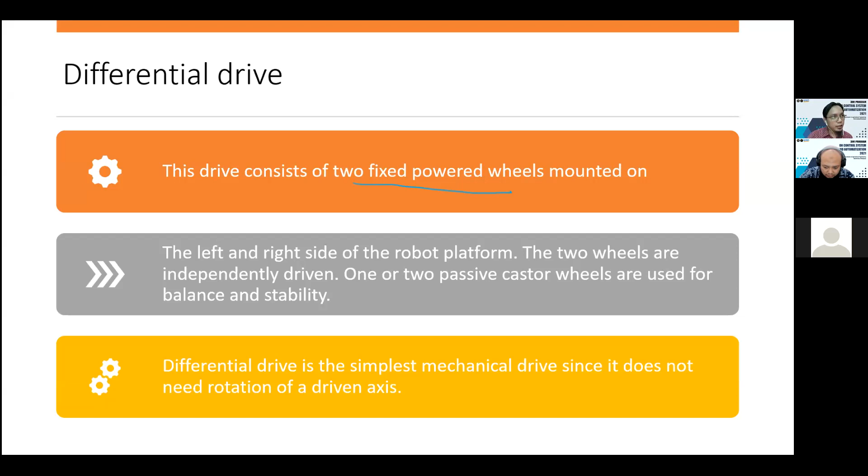Meaning you will have two motors and at least one caster, so that your robot can be balanced. This is the simplest mechanical drive, since it doesn't need rotation of a driven axis. So we don't need a steering drive; we only need two tires. So this is the concept of the differential drive.

And if we reverse the polarity like this, you can create a circle, but the circle is not at the center of gravity of the robot. It's at the center of the axle between these two tires. That's why you can see this is the circle rotation of the robot. Some people get confused and assume the circle is at this part, but in actual cases, for the differential drive, the circle is driven by these two things.

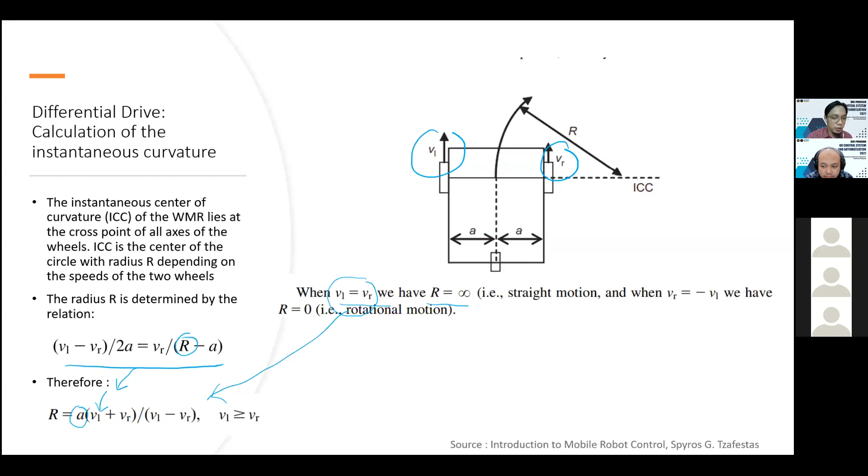And next we have tricycle motion. This drive has a single wheel which is both driven or powered and steered. Compared to the differential drive, it only has a single wheel, whereby the single wheel is driving and steering. Then for stability, 2 unpowered running wheels at the back or front are used in order to have the 3-point contact required, because when you put your mobile robot on the base, you need at least 3-point contact on the ground so that the robot is stable. So normally we will have 2 caster wheels for tricycle motion.

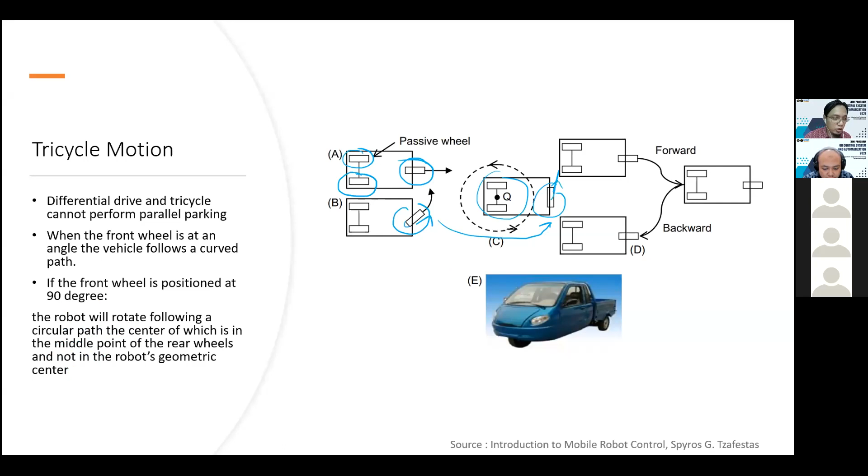Okay, so this is the configuration of the tricycle motion of the robot. So this is one of our projects actually. So we try to make this forklift autonomous. So if you see here, the forklift, actually the electrical forklift I'm talking about, there are different kinds of forklift, but the forklift that we are using, maybe let me pause first.

The forklift that we are using is using what we call a tricycle motion. So it's actually an electric forklift. So if you see from here, there is a shaft over here connecting to this tire. So this tire can be used to control the drive. But you can see here, normally when we have an electric forklift, the operator will control this steering, right? The steering, so that you can create a movement of your robot.

But if you want to make this robot become autonomous, right now we already have one single speed drive tire here. So what we do is we install one motor that is controlling the steering, and we replace the ECU inside here with our own controller. So this is the example of the tricycle motion. So if you see from here,

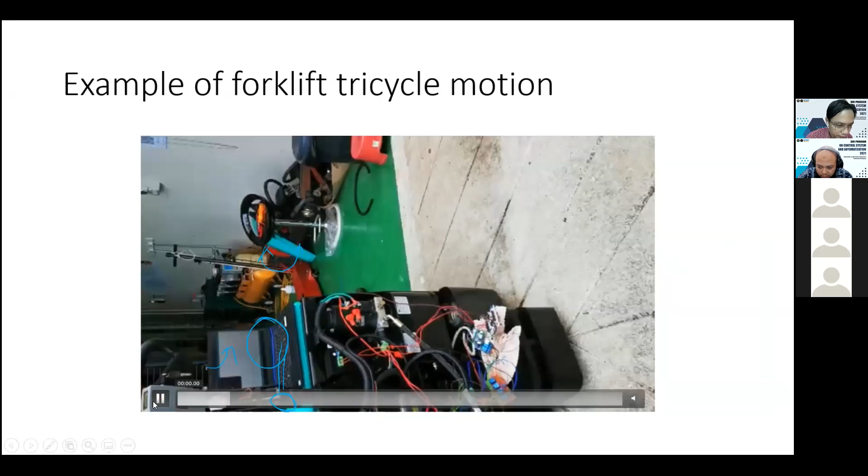when we install these two motors, you can see that first, there is a caster wheel at the back. So this wheel does not have any motor. They just run freely, but we can control the drive and the steer at the same time using the wheel inside here. So you have 1, 2, or maybe some will have 4 caster wheels, but one single wheel at this part. So this is the example of the tricycle forklift motion.

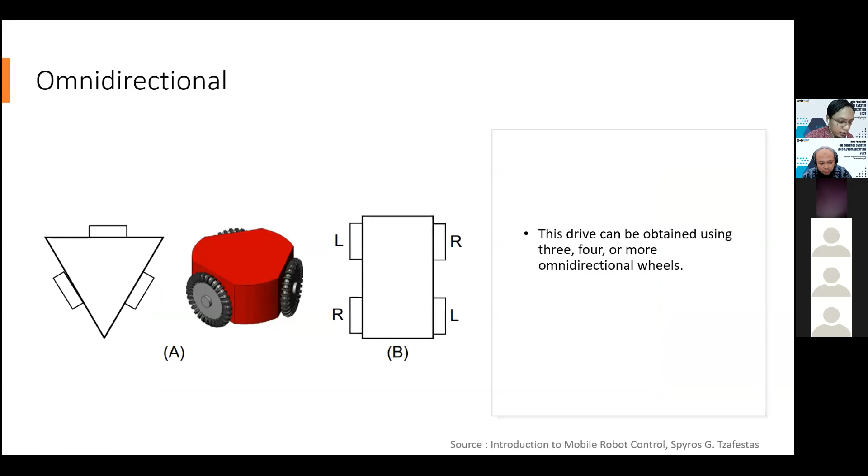And next we will have omnidirectional. So this drive can be obtained using 3, 4, or more omnidirectional wheels. So using this omnidirectional, for example, this 4 mecanum wheel configuration, this type of motion is the most flexible motion, whereby you can have a parallel motion. So if you see from here, we will have a parallel motion by controlling the magnitude and the vector direction of each wheel.

So if on the left side you have the reverse polarity, and on the right side you are going outward from the vector direction, you can have left parallel motion, you can have the turning that you want by having this configuration, and you can have a right parallel motion. So this is the most flexible configuration, but of course, this is the most complicated kind of motion for our robot. But normally, it depends on the application that we use.

For example, if we really need to design a robot, normally this kind of parallel omnidirectional, we use it on a flat surface, and in a plant where the space is limited and you need to have a parallel side motion. So this is the type of configuration. But if you have plenty of space and you still choose this type of configuration, it means that you are introducing more complex joint motion into your system.

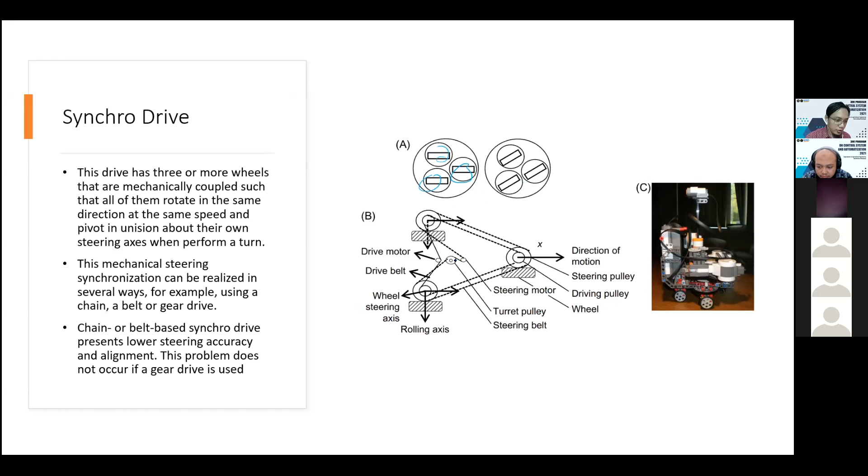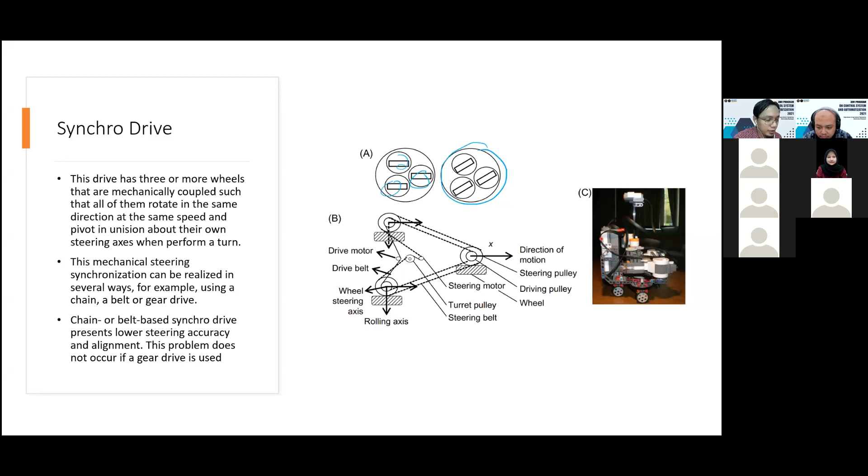And the next part is the synchro drive motion. So the difference from the previous motion is we will have a drive at the tire here, but for the steering, you will have something like a mechanical linkage steering. So if we rotate the steering, these three will be steered at the same time. So this kind of configuration will ensure that you don't have any difference in terms of the steering value, by having some belting at your motor, at your tire. This configuration we call synchro drive.

The reason is, if you want an application that requires a very precise angle for each of the robot's tires, you can use this configuration. But the problem is when we introduce a mechanical linkage such as a belt, you have to consider the resolution of the belt. If you are using a chain, the chain also has a minimum resolution. So if you want an angle of rotation less than a certain degree, you cannot have that because of the mechanical constraint. Also, if we are using belting, we need to use, for example, a steering tensioner.

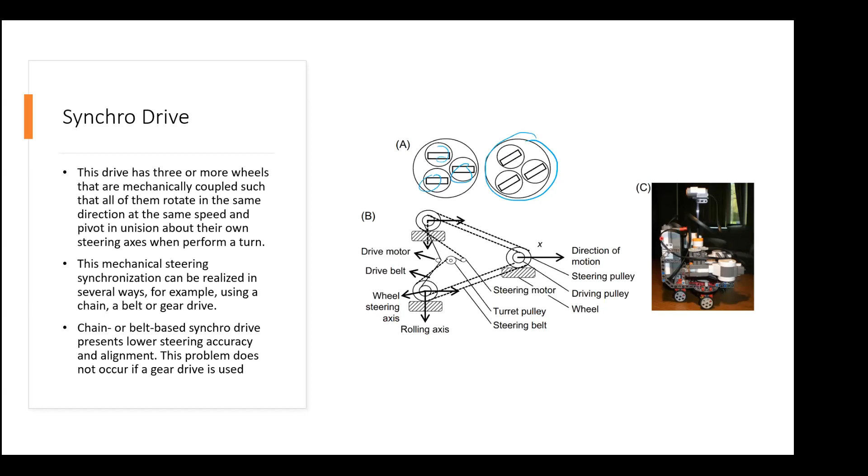This kind of mechanical complexity will be introduced, and it becomes more complex because you are trying to create an advanced system, and at the same time you have to deal with a mechanical problem. So this is the limitation of the synchro drive. The next is also the most famous one, what we call Ackerman steering.

So this also kind of configuration is being used in mobile robot navigation. Normally we are using two kinds of configuration: either a differential drive or Ackerman steering. The tricycle and the forklift motion are not common. Normally they don't opt for the tricycle motion. The Ackerman steering is the standard steering that is used in our car, in automobiles.

And some outdoor robots, for example some agriculture robots, also use this kind of Ackerman steering. It consists of two combined driven rear wheels, meaning we have driven rear wheels connected by one axle, and two combined steered front wheels. Ackerman steering is designed to ensure that the turn of the wheels at all axles have a common cross point, the instantaneous center of rotation, which we need to understand in order to predict the cornering. Ackerman steering also tries to avoid slippage.

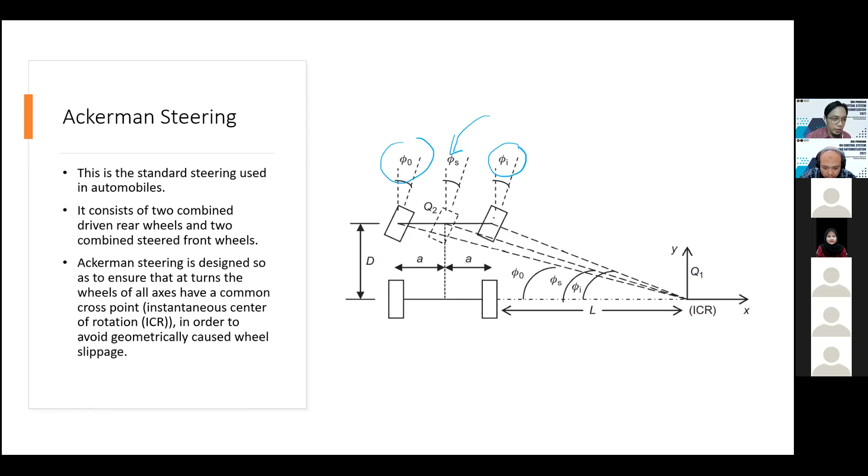Next, we have the skid steering configuration. This is a specialized implementation of differential drive, realized in tracks in the form of bulldozers and armored vehicles. It's different from differential drive and increases maneuverability in uneven terrain. So in agriculture, for example, where you have very uneven terrain, you can opt for this kind of configuration. It has higher friction due to its tracks and multiple contact points with the terrain, rough or even. So it's like an armor.

That's why we see it used for military purposes, for bulldozers, or for tractors and future mobile robots for agriculture; they use similar contact points like the skid steering configuration to increase contact with the uneven terrain. So for agriculture, this may be suitable. And right now we have been through a lot of the configurations of the mobile robot.

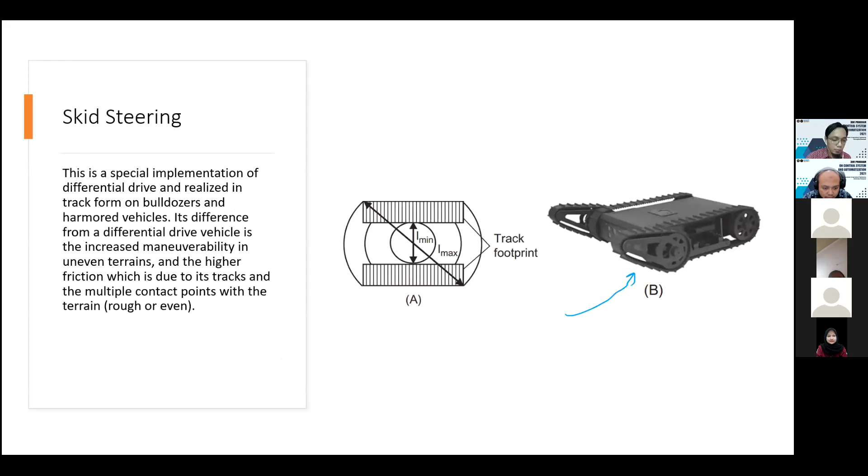Now we want to understand why we need this kind of mathematical configuration. This is what we call mobile robot kinematics. So what is mobile robot kinematics? It is the configuration of the robot in our space. We try to understand the relation of the robot with its geometric parameters, the robot size, and the constraints: what maneuvers this robot can and cannot do, depending on the trajectory. That is why in your simulation your robot moves in a certain kind of motion. It cannot suddenly parallel park. Even if you modify the coding, you cannot have parallel parking. You need to modify the mathematical model itself.

So the kinematic equation depends on the geometrical structure of the robot. For example, your robot can have Cartesian, cylindrical, spherical, and articulated structures. This is more for robot arm configurations. So this is just the introduction to robot kinematics. Normally, if we want to understand how our robot moves in certain parameters, we need to understand these three kinds of information.

Actually, it's quite a topic, but I try to give an overview because it involves a lot of mathematical equations. So there will be direct and inverse robot kinematics, homogeneous transformations, and some constraints on the system. So for example, what is direct and inverse kinematics?

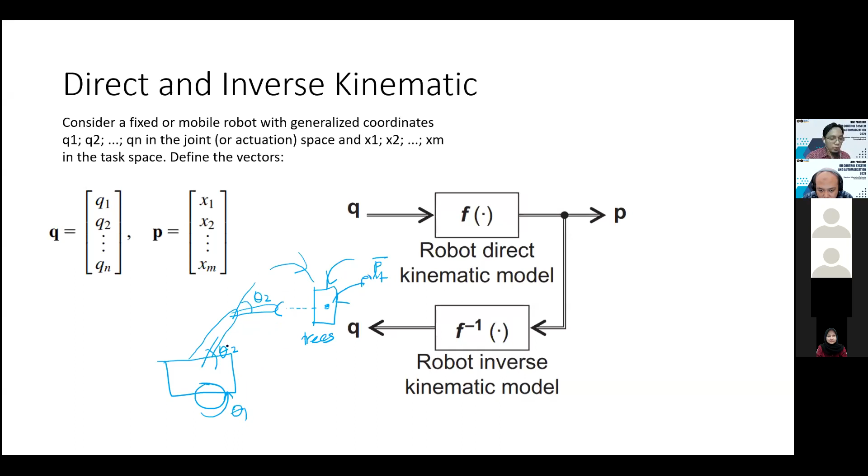So the question is, what happens if I change the value of theta 1, theta 2, and theta 3 so that I can arrive here? So this is what we call a problem that we have to solve. We have two problems here, the direct kinematic problem and the inverse kinematic problem. So the direct kinematic problem is, let's say, I call it direct kinematics.

If I change my theta, meaning if I change my theta 1, theta 2, and theta 3, what will be the position of the robot, right? So this is the direct kinematic problem that I have to solve. With that, I need to understand what is the mathematical equation that I have to derive inside my robot. So this is what we call the direct kinematics problem. And next is inverse kinematics.

Okay, so the inverse kinematic problem, if we compare with direct: for example, if I give a certain value of theta 1, theta 2, and theta 3, maybe my robot will arrive at this location, at a second location, which is from A to B. So when we want to predict this thing, we need to have a math equation of the direct kinematic problem.

But for the inverse kinematic problem, for example, I want to go to this tree. I want to go to this tree whereby this tree has this point. For example, this tree is a tomato tree. So if my robot wants to harvest this tomato tree, it means that I need to know the location of this tomato tree, right?

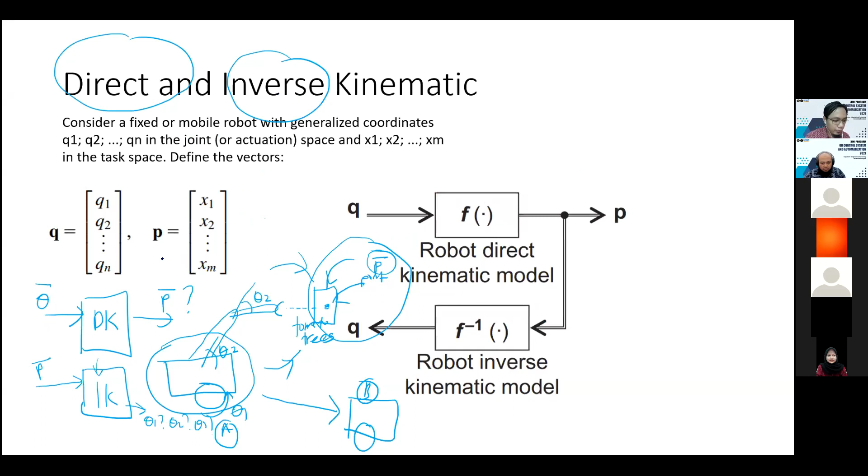So that's why you can see from the diagram that I drew for you, normally we translate this diagram into a mathematical matrix, because this mathematics will be put into our computer for calculation. So we will have some matrices, some equations inside here. And kinematics is the branch of mechanics that investigates the motion of material bodies without referring to their mass or moment of inertia, or the forces that produce the motion.

Clearly, the kinematic equation does depend on the fixed geometry of the robot in the fixed world coordinate frame. So when we consider robot kinematics, normally we consider that the robot is moving at X and Y coordinates, and sometimes in 3D coordinate space, so we will have X, Y, and Z. We assume that our robot is moving into this space.

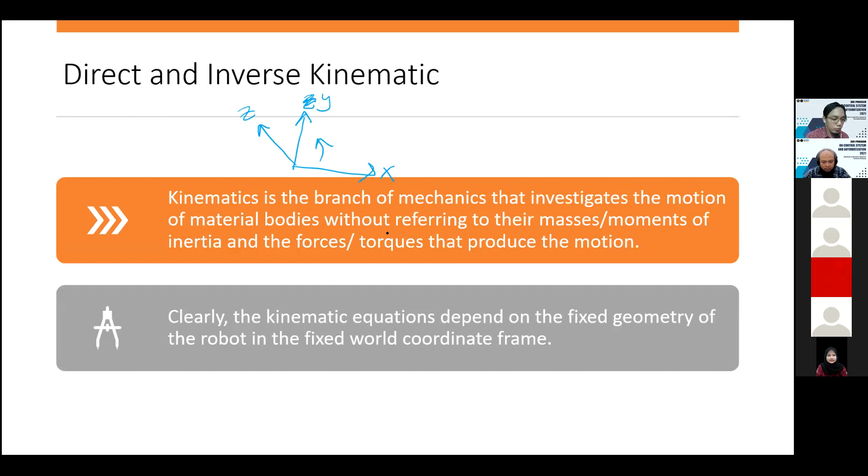And if you see this definition, we don't have any information on the mass, moment of inertia, and the force and torque that is required in applying this kind of motion that we want.

But for a very heavy application, let me give you an analogy. When we are driving a car, if we drive at a very slow motion, maybe 5 km/h, very slow, and you want to brake your car, you can immediately brake without anything happening. You can immediately stop at the point that you want. So this is what happens when you drive your car very slowly.

But when you drive a heavy car, like a lorry, at a very fast speed, for example 80 km per hour, and you try to stop immediately by pressing the brake maximum, you can see that we cannot immediately stop the lorry. There will be some effect. This effect is called the inertial effect, and the moment of inertial effect is due to the mass that is introduced to the body of your system.

Because of that, we cannot rely on kinematics alone if we have this kind of very fast and heavy robot, whereby we need to consider the dynamics as well.

And also, in robotics we have a new term, what we call the Jacobian matrix. Normally you can see some mathematics here, so I try to put it in a very simple way to explain.

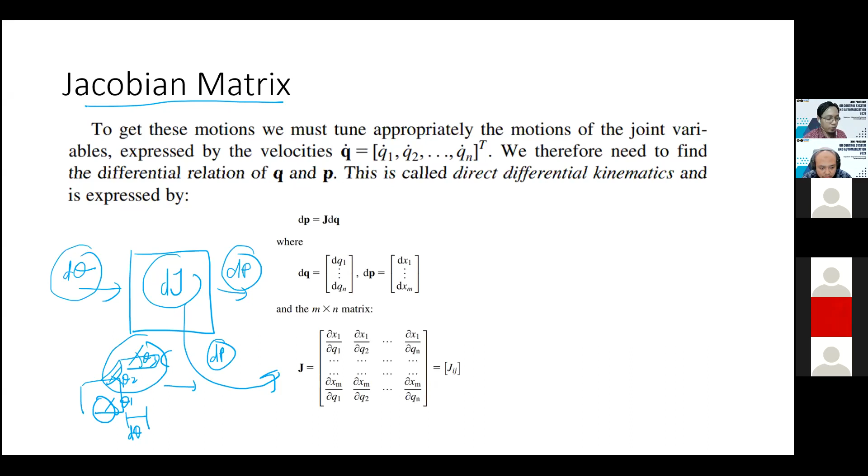So by having this kind of prediction, I can predict what will be the generated velocity of my robot, the generated position displacement of my robot. This kind of displacement relationship is normally expressed by what we call a Jacobian matrix. This is a term we use a lot in the mathematics. The Jacobian matrix will also have a direct Jacobian and an inverse Jacobian, similar to direct and inverse kinematics.

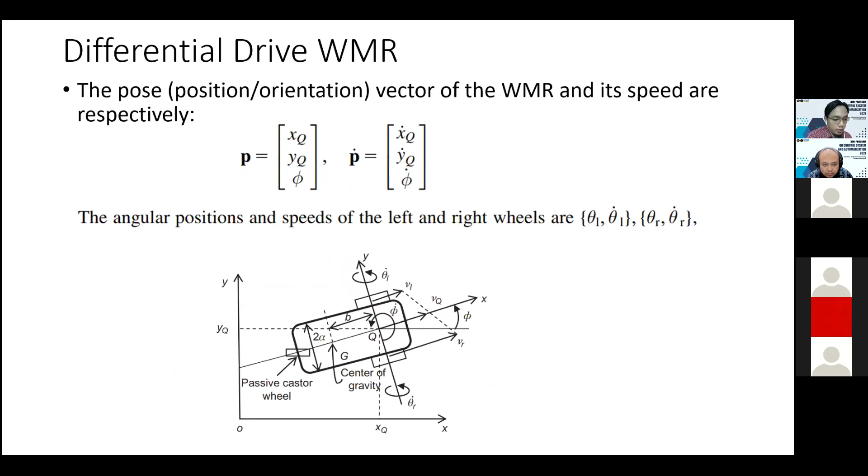I don't want to go into that, but this is how we go into the mathematical representation of the Jacobian of the robot. Next, just now we saw the differential drive robot configuration. I showed you that by understanding the left and right positioning vectors, we can do the differential motion and predict the radius. In fact, if the position of the robot is defined by P, we can predict the position and orientation.

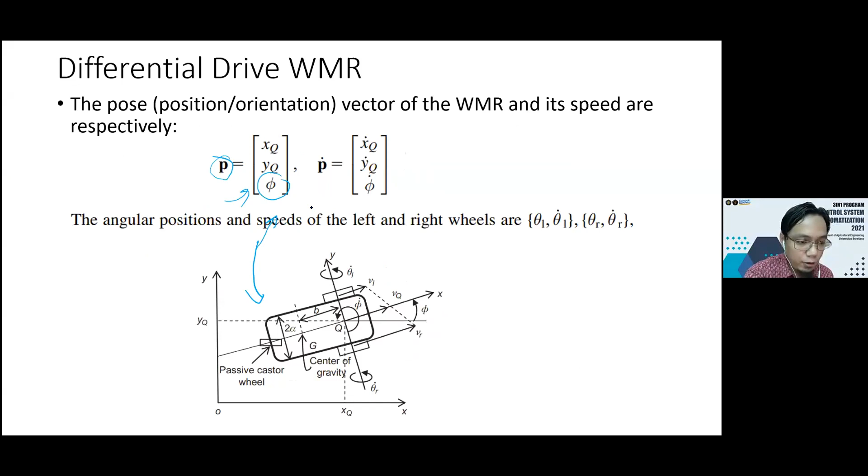This is the orientation of the robot. By having this kind of configuration, we can put whatever our robot location is, something like this, into a matrix form here. And if we integrate, we can do this kind of thing. We can have a velocity relationship of our robot. So when we put the matrix like this, you can see that this is what happens in a real case, in the robot.

And when we have this, you can calculate the velocity of your robot in the X direction. We have X and Y directions here. If we have a movement on the X direction, that means you will have a velocity movement in this direction. And if you have a movement in the Y direction, that means you have a velocity movement in the Y dot direction. Eventually you will have your VQ, your total generated velocity movement at this direction. So with that, we can break down our velocity relationship into two axes here.

So you can see that we will have the velocity movement in the x direction, and we will have the velocity movement in the y direction, whereby you will have a total combined velocity with respect to your robot heading. So this is your robot heading.

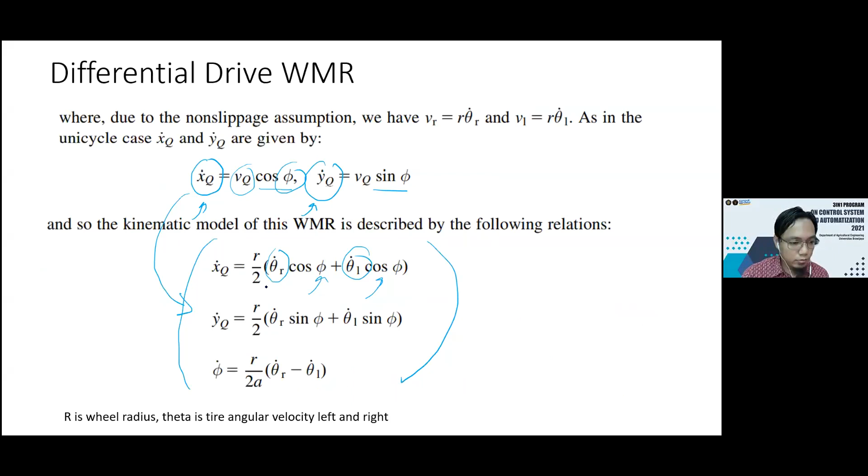The velocity and orientation velocity of your robot. And also the kinematic of the mobile robot can also be written in terms of the Jacobian matrix form. So you can see from here, we can represent the similar equation here. We can put it in something like this. We can rearrange into a matrix, and you can simplify it something like this. Why do we want to simplify it later?

Because normally when we want to do some control system analysis, some calculation of the motion, we will have this matrix easy to calculate using some tools inside the simulation. So that's why we need to arrange it into this form.

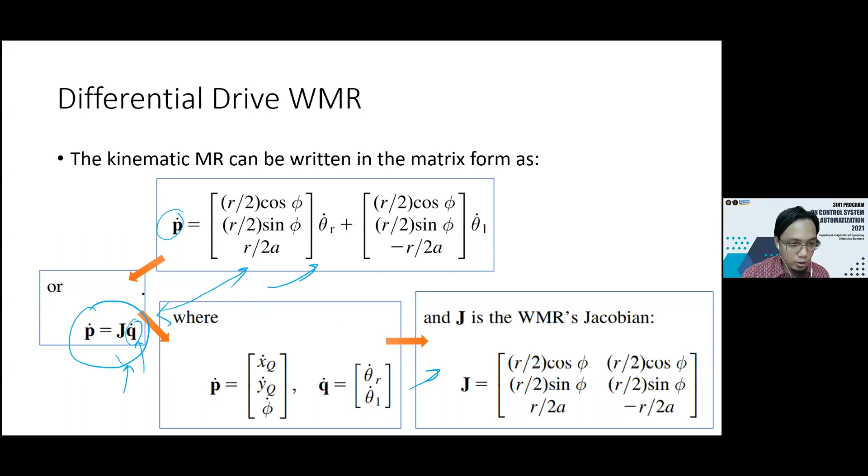And if you see this relationship, you can see here the general equation, and we simplified this equation on the bottom here. If we have a change in theta, in our robot's motor motion, theta dot, we call it theta dot, whereby we represent it by q dot.

And if we have a J here, this is the J, whereby the J is from the above here, you can predict what is happening to the position dot. So what is happening to the velocity, position velocity, means that you can predict this p dot here. So this is your p dot. So it means that we can predict what is the velocity motion of the system.

So if we can predict the velocity, if we want to see what is the location, you can simply do the integration, right? For example, I want to see what is my location in the x direction. I already know I have the x dot. So if I integrate my x dot with dt, I can predict what is my x direction, what is my y direction, by having this Jacobian matrix representation.

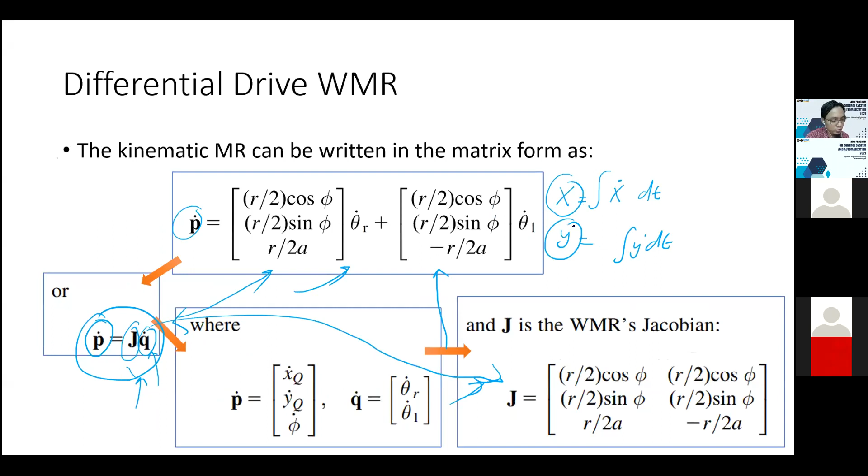So this is how we do it. And this is some example of the differential drive motion. So this is if we try to load it into the simulation environment.

So if you can see here, okay, this is one kind of robot whereby this robot has two wheels here, whereby each wheel is independent of each other. And this robot also has the inertial measurement unit sensor and odometer sensor, so that we can see and control it. So for example, on the terminal here, we try to give some command here, some cornering command.

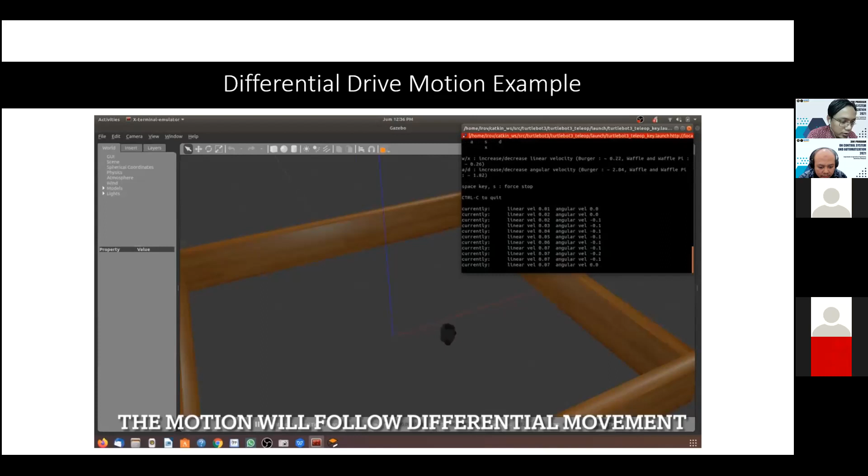So you can see that this robot does not have a parallel motion. It has some trajectory motion, like the example you did in Python. So the example like you did in Python will have the same kind of curvature motion on the differential drive motion.

So when we understand these properties, we can use, for example, if this robot is moving, and if we understand the mathematical equation, we can take this robot's dimension, and you can calculate it so that you can predict whether it has the same yaw rate, the same location, similar to the example or not.

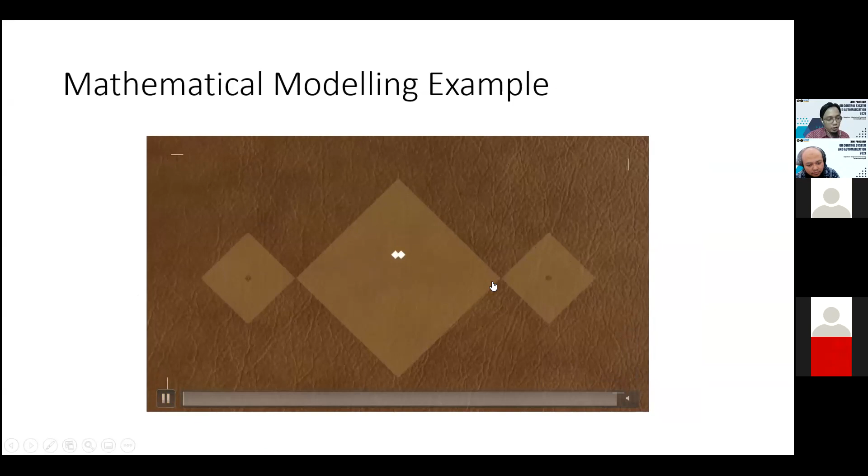And by having this, you also can, if you're familiar with MATLAB, do the calculation on the mathematical equation. So for example, this is the example of the differential drive mathematical equation, the mathematics that I showed you. So if you see from here, we can have the right wheel velocity, the acceleration of the right wheel, and also you will have a left wheel velocity and the acceleration of the left wheel.

So we can predict, for example, on the left wheel, we give a higher speed compared to the right wheel. We can play with it, and this is normally some Jacobian matrix, some mathematical equation that I showed you.

So we can play around to see how our robot behaves. So when we have this equation, we put it into, for example, MATLAB, or if you don't want to use MATLAB, you can also do the same thing in Python. And we run our simulation.

For example, you can see here, the left wheel velocity is higher than the right wheel. You can see that on the simulation just now, the movement of the robot is turning to the right direction.

So let's say we change it, the acceleration of the right wheel is higher compared to here. So it changes its movement from the right to the left, because of the acceleration that we give on the right wheel. So this is the example if we use the differential motion.

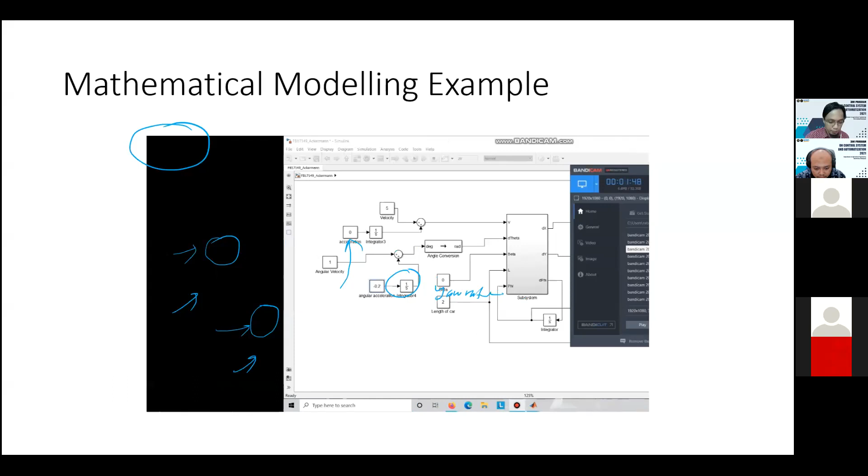So when we understand this mathematical modeling, you can predict this kind of thing, meaning that you can do later, when we do the control system, you can do the control system part. Okay, that is enough on the kinematic modeling of your system.

Also, okay, this is a kinematic model of lateral vehicle motion. What is lateral vehicle motion? When you have, for example, this is your robot, the motion of the robot, this is the global axis, you will have the robot axis. For example, let's say this is X1 and this is Y1. So this means your robot's front direction is like this, in the front direction.

So normally when we create a robot, we want to create an autonomous robot that moves something like this. And if we want to create the robot that is moving like this, we need to understand, for example, this is our road or our trajectory that we want to go. We want to understand what is the error in order to follow this road, whereby our objective is to minimize this error so that when you create the control system, you can achieve better control. This kind of error, we call the lateral error.

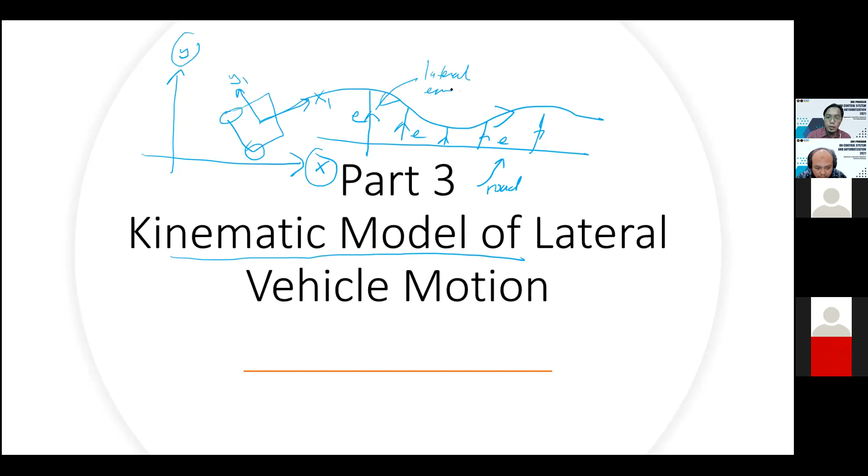And in order to understand the lateral error, we need to understand the lateral vehicle motion. So that's why we need to develop some of the kinematics of the lateral vehicle motion, as you can see on the screen here. So this kinematic, sometimes we call it a bicycle model, where we neglect some slippage of the vehicle itself, and we will have a bicycle model using the diagram here.

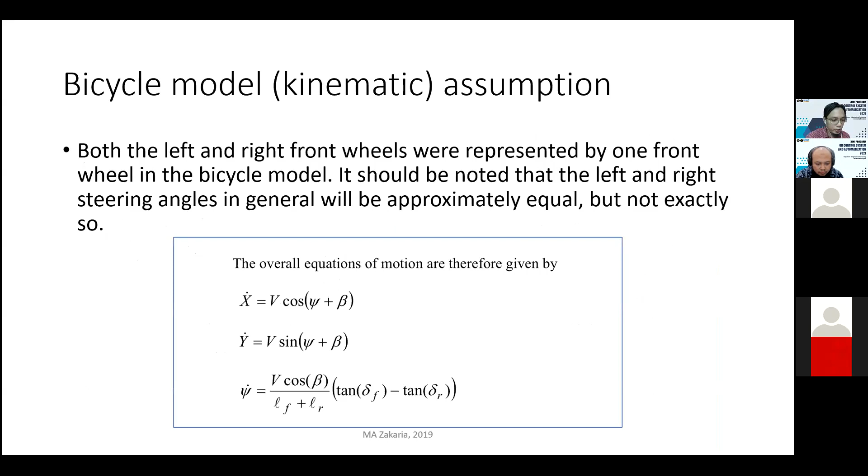We can use the same bicycle model, whereby the bicycle model will have some relationship between the body slip - what is happening if your vehicle or robot has some body slip - and what is happening if you have a steering configuration of your robot. And also we can consider the Ackermann turning geometry in order to understand the robot and its geometry.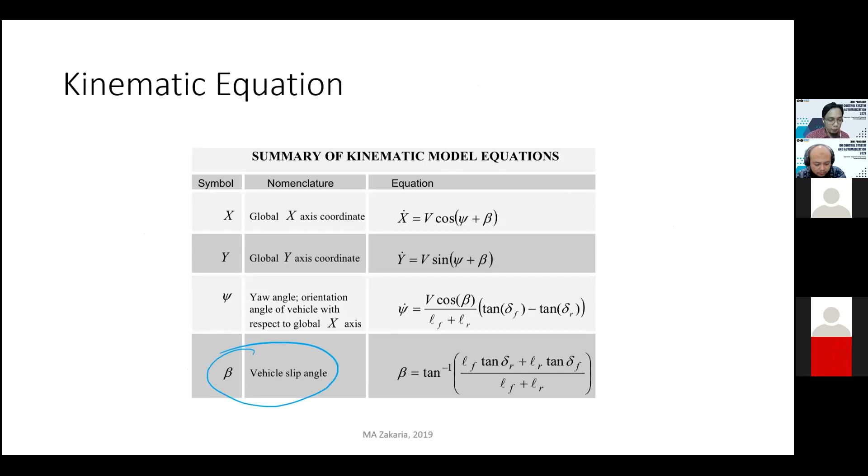And also, this is the summary of the kinematic model equations, whereby, for example, if we use vehicle slip angle, you can see that we have a lot of equations. From the previous kinematic, you have a general kinematic, but for this equation, the bicycle model, you have some equations that consider the robot or vehicle slip angle, so that we can estimate what is happening if we have some slip over here.

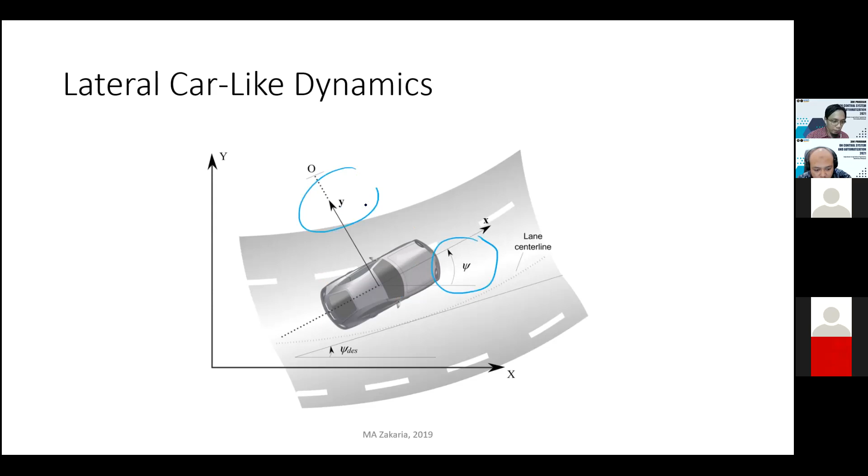And also, if we want to generate motion at higher velocity of the robot, we need to consider the dynamics as well, because the force of the momentum, or moment of inertia, is involved inside our robot's configuration. So at higher speed, the assumption that velocity of each wheel in that direction holds is no longer valid. In this case, instead of the kinematic model, a dynamic model for lateral vehicle motion must be developed, so we want to understand what is happening if we have a dynamic of our robot here. You need to understand, if we take a cornering here, what is happening to our yaw rate, what is happening to our robot.

So normally in the control system part, they have one topic they call the state space model, whereby in the mobile robot, normally we use a bicycle model for Ackermann-like steering, so that you have a state space configuration. This state space configuration tries to generate the behavior of our robot in this form. What is meant by this form is if we have any, they call it plant.

In control system terminology, they call it plant. But in simple words, this is your robot. Inside here, this is your robot. So if, for example, I'm giving my vehicle velocity at 100 km per hour, and I'm giving the steering angle as 20 degrees, right? In order to control my robot, means that my vehicle is traveling at 100 km per hour, whereby the steering of my vehicle is 20 degrees.

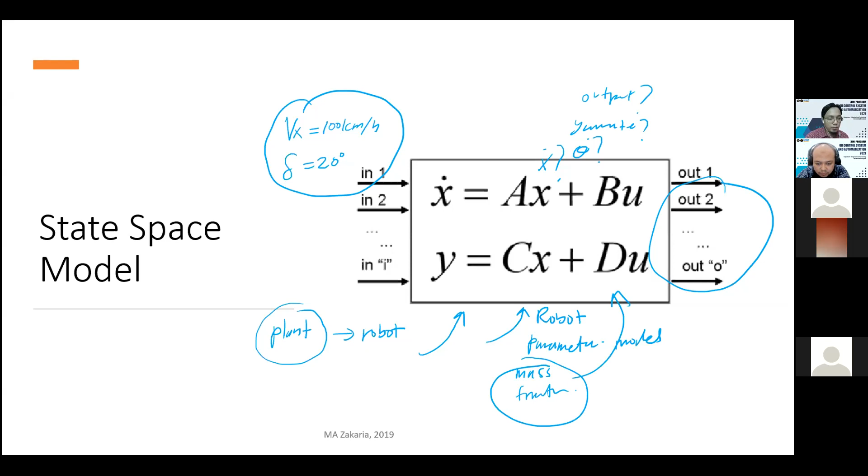What will be the output? What is the yaw rate? How does it move? What will be the position? Right. So this will become the output, whereby we can simulate what is happening. Inside this state space model is our robot parameter model. Means that you will put the mass of your robot, the friction coefficient, a lot of the dynamic parameters inside here. So if we have the dynamic parameters inside this equation, and we put the input, the steering input, and the velocity set that we want, then you will be able to predict the yaw rate motion of your system by having a state space model.

And we can also consider if, for example, your robot is navigating on different terrain, right? For example, you have a road bank angle, means that my robot is something like this. This is my tire. So if we have this kind of angle, we can consider it. For example, in agriculture, your robot is navigating on uneven terrain, whereby you have what we call a road bank angle, and the road bank angle is always changing its value. Normally in the experiment, to measure this inclination, we use an accelerometer so that you can estimate the inclination angle of your robot. Using state space, you can also estimate what is happening to your robot if you consider this road bank angle.

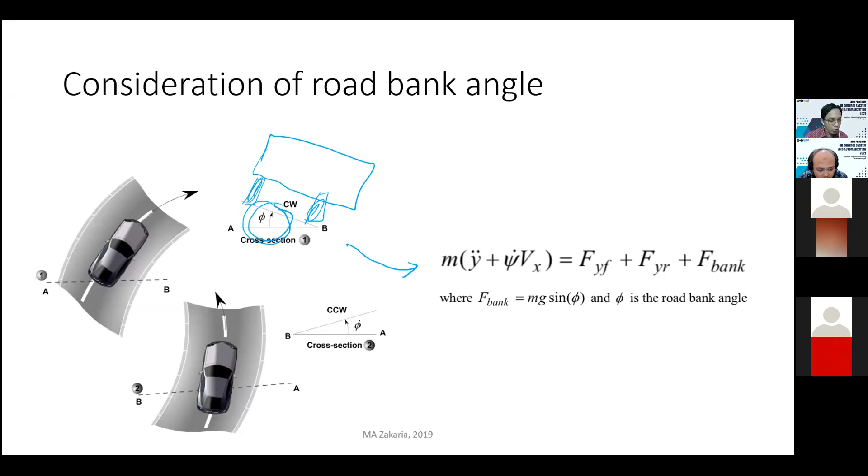And when we develop this state space, we can expand the model by understanding what is lateral error and what is orientation error. So the lateral error, as I said, for example, I have my target point, my road here. I want to go to the target here. So this is E1, my lateral error. What is my orientation error? Let's say this is my robot heading, heading angle 1. And this is my road heading in this direction, heading angle 2. So you can see that we have two different heading angles, H1 and H2, whereby this difference is called the orientation error.

So if you minimize E1, if E1 becomes 0, we can say that the robot will be located on our target trajectory. If E2 becomes 0, we can say that the robot follows the orientation of the system. Okay, so this is actually the simulation that you did in Python in Anaconda previously. You have three simulations: move to pose, model predictive control, and another simulation, I don't remember the name. One more is the Stanley controller.

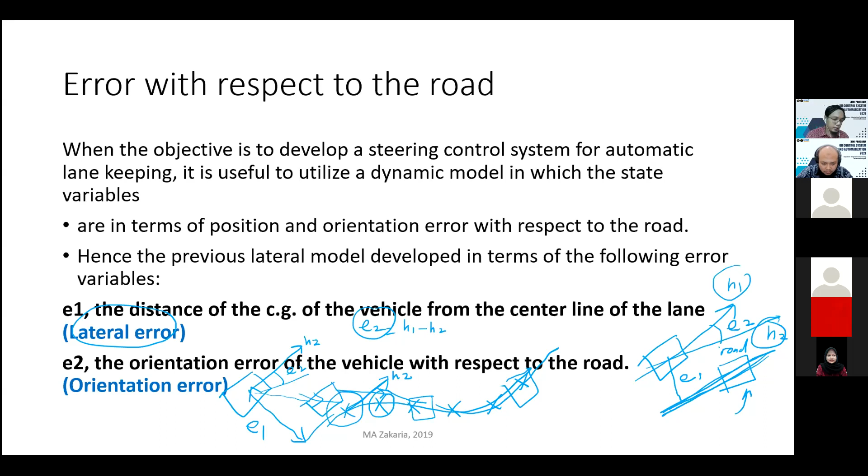So there are 2 kinds of error that we need to understand: the distance error, lateral error, and the orientation error. So these 2 errors are the most important errors when we want to develop an autonomous robot. Of course, there will be other errors. For uneven terrain, maybe you have a roll rate error, this kind of thing. But the basic is these 2 errors that we have to understand first.

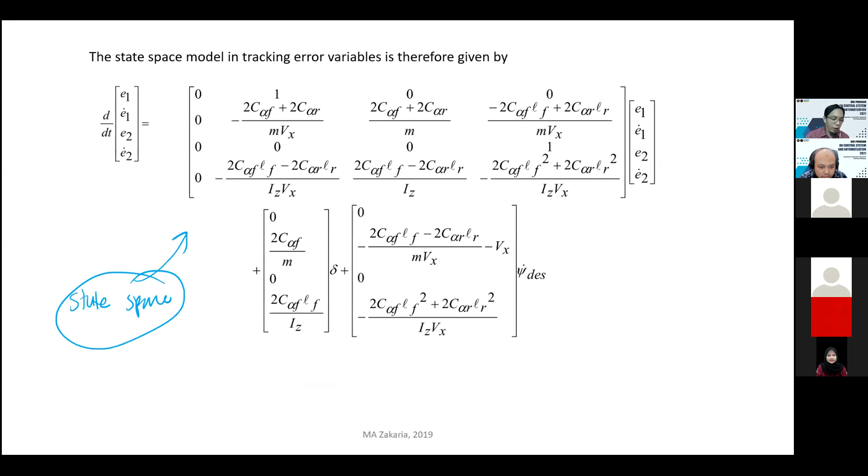And using this error, we can derive the equation here. Just see the slide. Yeah, they have some mathematical part here. And eventually we can relate the error that we want in the state space form. So we can generate a state space form here, so that when you have this state space form, we can simulate the movement of our robot, the dynamic movement of our robot.

And if we include the road bank angle here, which is the sine phi here, you can see that the equation becomes something like this. And if you put this equation inside Simulink, you can generate the movement of the robot. And in fact, you can do the state space simulation if you don't have MATLAB installed in your laptop. You can do the simulation of the state space in Python as well.

You can Google the state space Python toolbox. Then there will be a Python toolbox, and inside the Python toolbox they have A, B, C, D, so that you can put the matrix of the equation inside Python, and then you will be able to generate the motion equation of your system. And this is the summary of the motion equation of the robot.

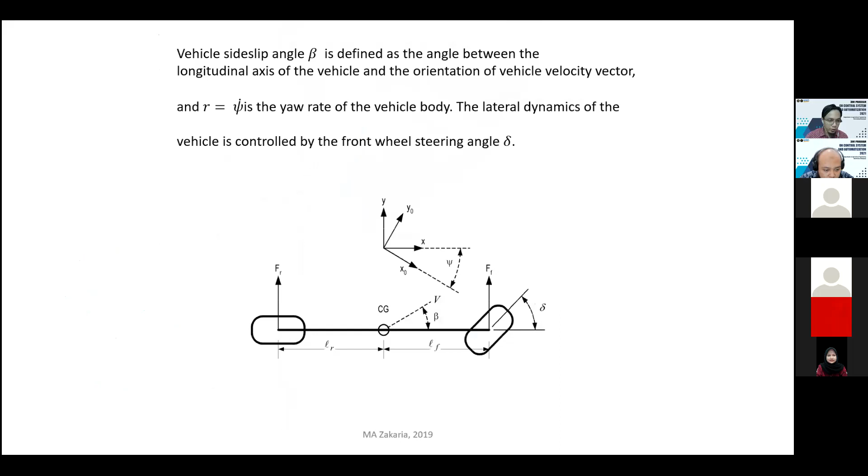And do we have a detail about the dynamic motion in terms of the lateral? You can estimate the force motion using this equation, the body slip. I don't want to go in detail in this equation, but I just show you an overview so that you see what is happening if you go in detail on mobile robot navigation. So you will see a lot of these equations. Although it seems complex, it is necessary for us to really estimate the motion of our robot.

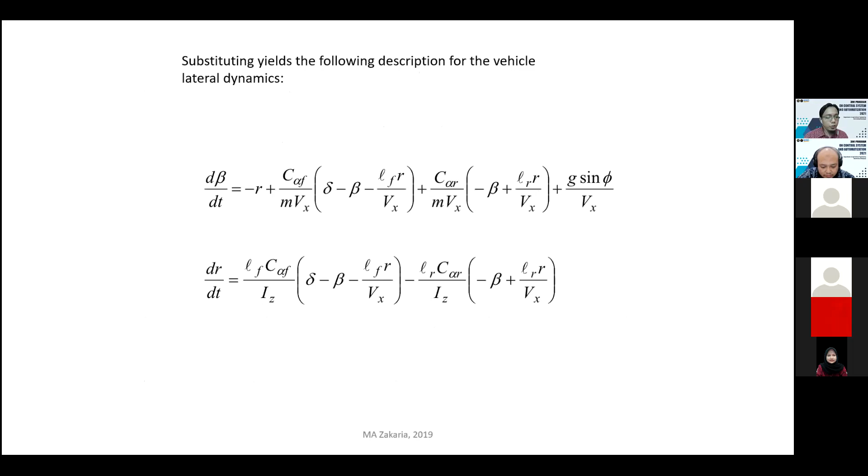So in summary, I have shown to you the kinematic and dynamics model of the robot. And in order to understand this model, more in-depth study, of course, every topic you will have a lot of analysis you have to do. So I hope that with the kinematic overview in the topic that I shared, you are able to have some brief overview. You are able to understand what you are doing with the simulation in the last lecture.

And a good understanding of how the model works will give us an idea of how our robot will perform during the experimental development. So when we want to design our robot, normally we will put it into our simulation platform first, and it will assist our control system development. So normally we don't directly put our control system in our robot. We will try to simulate it, try to tune it, and after everything is ready, we will put it into our control system development. Okay, I'm going to change to a new topic.

Is there any question? I hope that you don't get confused with the equations. Is there any question from students or also some of the lecturers here?

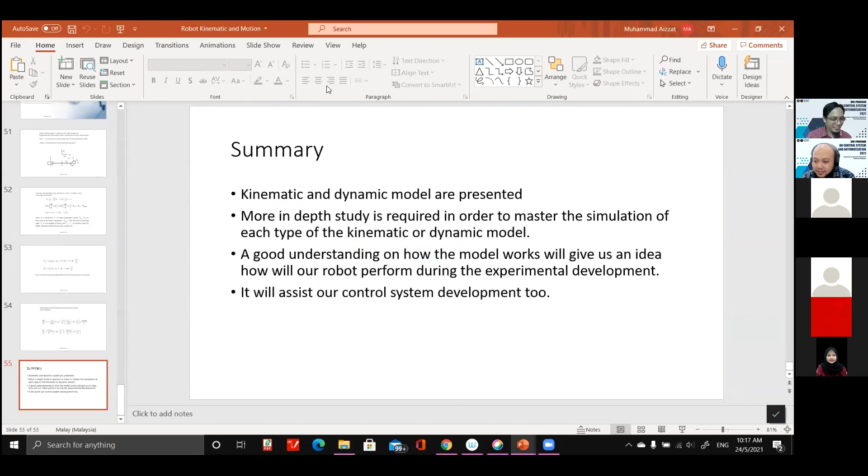I think I just want to have some comments actually. Okay. Actually, in modeling, students will have their lecture in modeling next semester. The students will understand that, will learn the state space model. Oh, good. Actually, in the modeling in biological systems also. Okay, good, very good. So that means they can continue.

Pak Dimas, I also teach the modeling actually. Yeah, so that means they can use the same equation in the state space model, then they can proceed further. I think that's better for them. Yeah, they can also try it in the practical assignment. I agree. Oh, that is good.

Because state space is one chapter in control systems as well, right? They need several topics in state space itself. So maybe I just give an overview only. I don't go into detail in this lecture because of the time. If they want it in detail, I think they will take the modeling. And I usually use MATLAB, but I think Pak Dimas uses Python. Yes. I teach them Python.

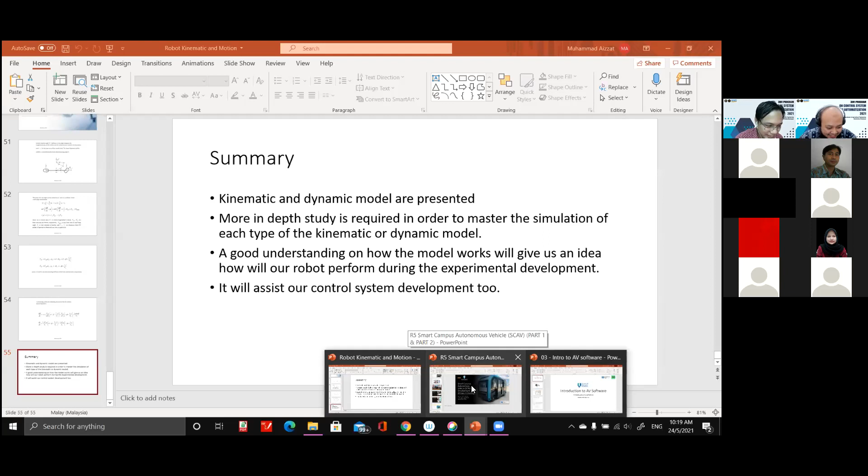So actually, I want to continue from the previous sharing on the case study that we developed in our system. From the previous one, we developed our lane tracking, which is based on the previous topic, sensors, from the image processing sensor. Next I show you why the concept is very important, because by understanding the fundamental aspects, you can create ideas and small things within the student's budget. And when you grab the concept and have more budget, you can expand your ideas.

For example, when I did this with my lab mates, we wanted to create something big because we had already created many small things before. So we started with brainstorming the idea. This is the brainstorming inside the lecture room in 2019. We imagined what we wanted to create, what sensors we wanted to use, where to use them, where to place the battery. So we put down a very general sketch. I show this diagram because it is what kickstarted our project.

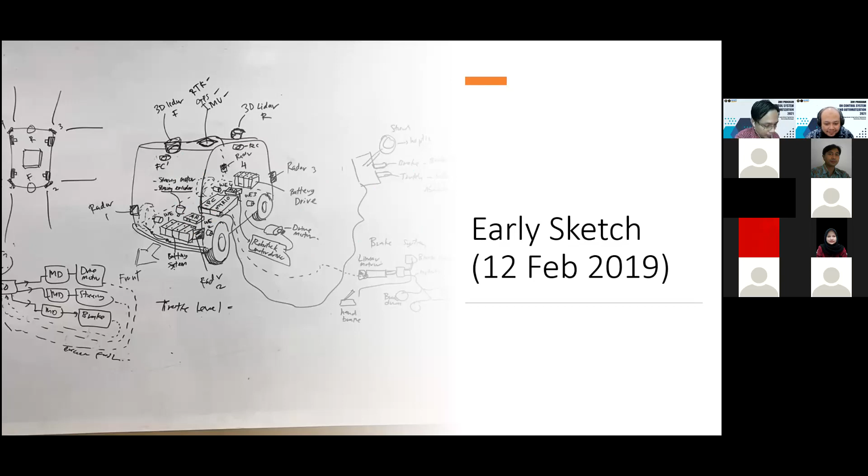I can say that the big thing started from a very small sketch only, and we put some automation for the autonomous vehicle. And it's not just for vehicles, it's for any robot. You need to have a level of automation, from level 0 until level 5. If you want to build an autonomous tractor for agriculture, your robot needs at least level 3 or level 4. So this is part of the autonomous architecture.

Level 5 is fully autonomous, meaning your robot can adapt to any environment and quickly relearn in a very dynamic environment. But a good case is if we can go for an autonomous system at level 3 or level 4. This is what we do in our autonomous bus, and the project is still in progress. We try to develop it in different specific tasks.

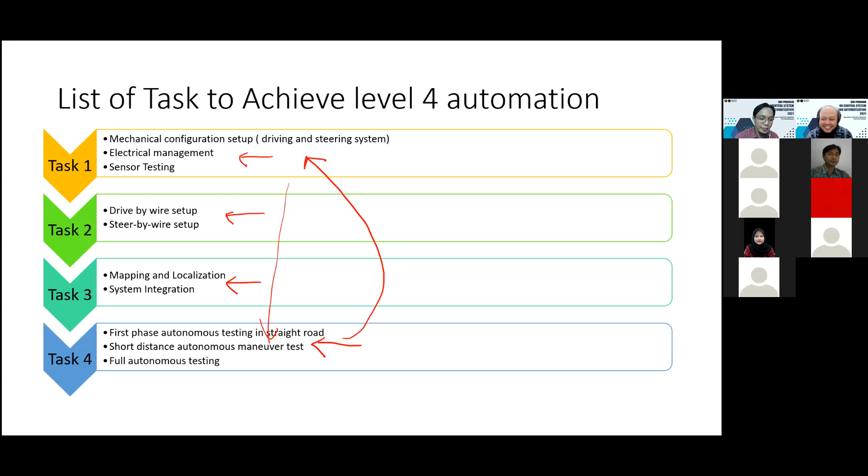Sometimes you feel that you want to give up, but this is normal, especially for students. Even if you start a very simple project that your lecturer gives you, you will feel that, yeah, you short circuit and your controller burns. I think it's normal. In fact, we still have the same thing.

Okay, so this is task number 1. We do the mechanical configuration setup, the driving and steering system, then the electrical management and the sensor testing. We start with the selection of the driving system, in this case the gearbox. We selected a 20 kilowatt electric motor.

In the first prototype, we had a problem with our gearbox, where there was a misalignment between the coupling and differential gear, causing friction and wear. Although the bus can be moved, because of imperfect alignment, maybe during the CAD design development we didn't really fit it well, you can see friction and wear, and you can smell the heat over here on the driving system.

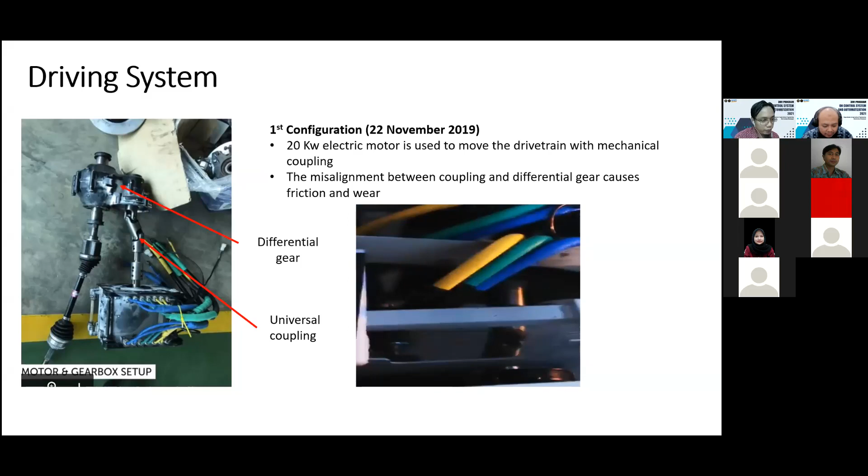Because of that, we modified it. We saw this failure, removed it again, and used a second configuration. Now our bus can move, but this configuration uses a bevel gear, and this bevel gear contributes a lot of noise. The electric bus can be moved, but when we drive it, there is very high noise inside the bus itself.

We don't want this, because when we say electric, we expect the bus to be very low noise. So this is not a good configuration. These drivetrain issues are very time consuming. We stayed at the lab doing a lot of analysis until 2 a.m. in the early morning, and we called a lot of drivetrain engineers in our team to do some calculation to solve this drivetrain issue.

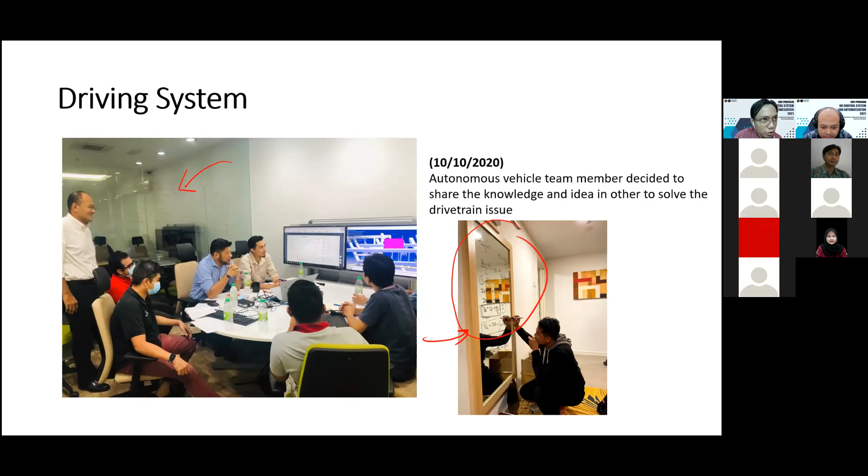This is the part where you need fundamental knowledge. You can see my student doing some mathematical calculation here, dynamic and kinematic calculation on the mirror, because we really need to not repeat any failure we made previously. This is the dynamic calculation, maybe you learn it in dynamics, to calculate the value required for us to move the bus.

Next, we changed the configuration of the drivetrain. With this drivetrain, we eliminated the jerking. This drivetrain is configured based on our previous calculation, and the configuration is better.

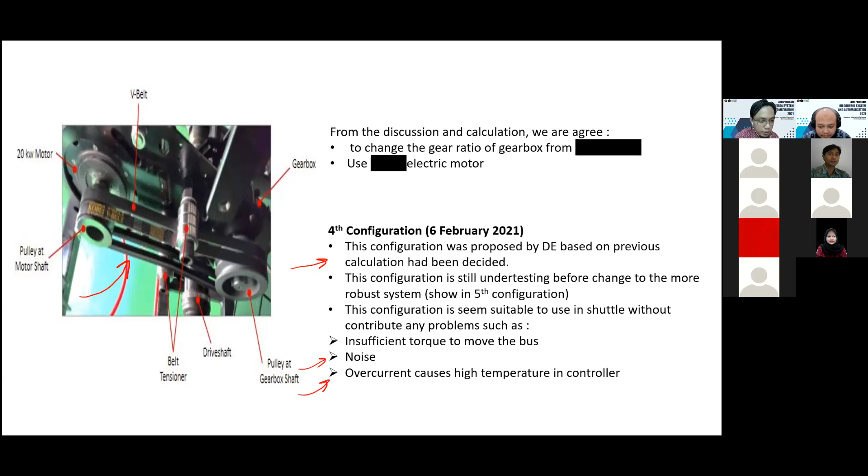It does not contribute to the noise because we use belting and tensioner, but we have insufficient torque. This thing moves, but sometimes during the first phase, it takes a lot of time to move the bus, and although the noise is lesser, they still have noise and some overcurrent issues that cause a high controller spike in our bus. These are the drivetrain issues.

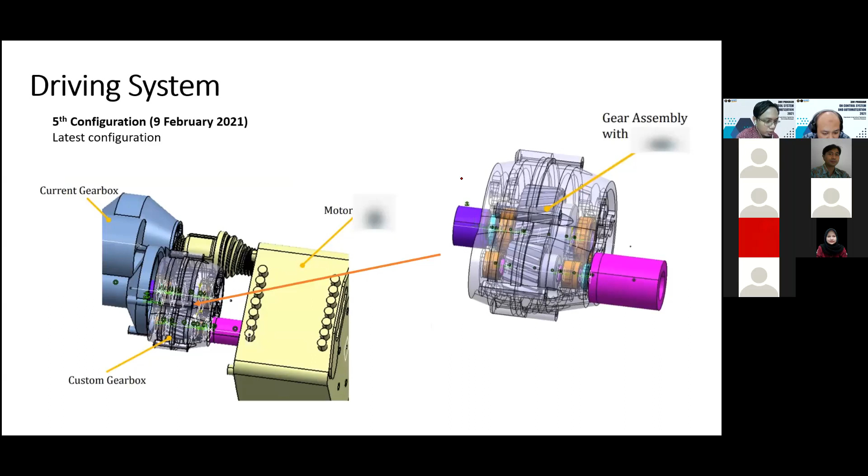And because of the issue, we decided to design our own gearbox. So this is our current gearbox that we designed for our driving system, and you can see, okay, this is inside this gearbox. Inside here we put some liquid, and then we seal it. The reason why we put some liquid is to avoid wear and tear.

And then when we put it in, alhamdulillah, this bus can have good motion now. I don't know whether there will be any issue later on. And this is another configuration that we use when we want to modify the shuttle. This is on the steering, in the front of the bus. The first configuration is we use this electrical motor.

We have some chain here, and this chain here will drive the electric motor pump. Of course, if you use chain, it works, but it contributes to a lot of noise. Because of that, we tried to change to using a belt. Using belting, the torque here is reduced, and you have a slip in the belt control.

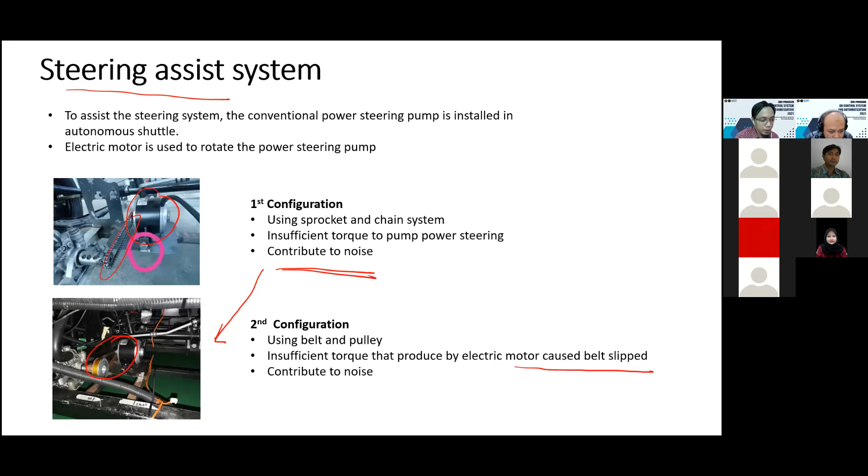When you understand the Ackermann steering configuration, you have a drive and you have a steering. We want to control the steer angle. If you want to control the steer angle, you have to ensure that the pump is working perfectly, so that you don't have any slip, so that you don't have any noise in the sensor reading because of this slippage.

So this is our latest configuration. We are using an electric assist system. We call it EPAS, electric power assist system. In this EPAS, we are using our customized controller inside here, so that we will have a torque sensor. We can feed back a torque and use it in our control system, so that we can simulate here.

So here you can see that there is a steering wheel here, but we don't use the steering. We feed it back directly to our control system computer. So with that, we solved the mechanical issue.

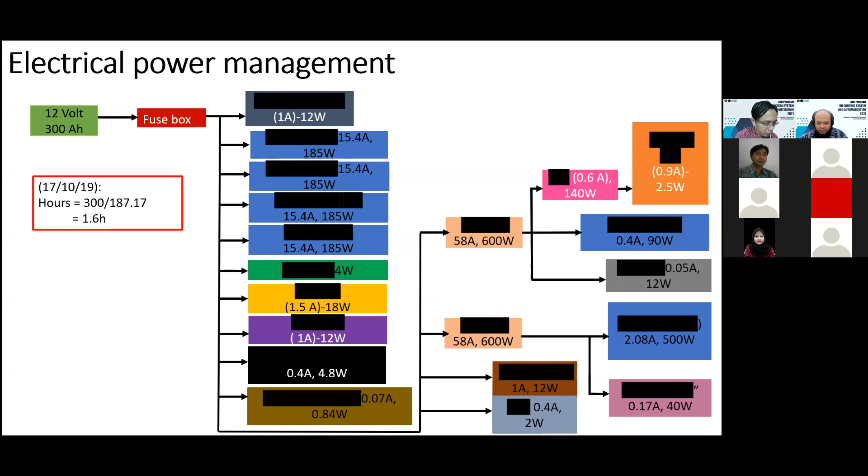And of course, when we want to develop something, we calculate what the current consumption is for each of the computers inside our electrical management. We try to calculate how long our battery can last. For example, in our configuration, the maximum our battery can last is about 1.6 hours, less than 2 hours. Because of the battery constraint, this is our maximum. Not too long, but this is just for a prototype.

And we try to calculate the total power. For example, if you have multiple computers inside your bus, you need to calculate the power drawn and the sensor draw. You need to calculate everything, and from that calculate the total power required by your bus. For example, you have a rotary encoder, an IMU, and some inverter.

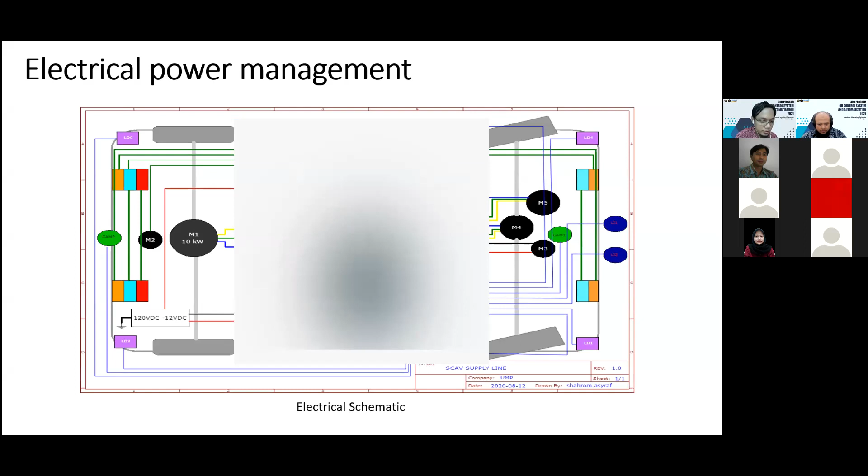And of course, we need to design our electrical power management. You need to have some circuit lines connecting to the computer, electrical power management, and some sensor lines, and know the voltage that you require. And you need to have your battery management system. Either the battery comes with a battery management system when we buy it, or we need to buy a separate battery management system to regulate the battery. In this case, we customized it so that we can display it on an LCD.

And after that, we did the sensor testing. As you see here, we put our LiDAR inside here to simulate, because during this initial testing, the bus was not yet fabricated. So when we want to fabricate the bus, we have to know the exact location of the sensor that we want to place.

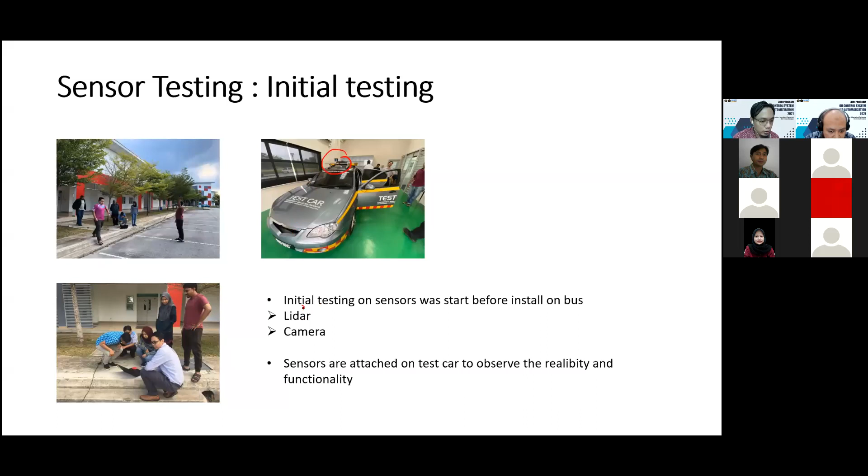So in this part, we try to calibrate the LiDAR and camera for our bus. And after we calibrate using a normal car, we can have the exact dimension of where we want to put our LiDAR.

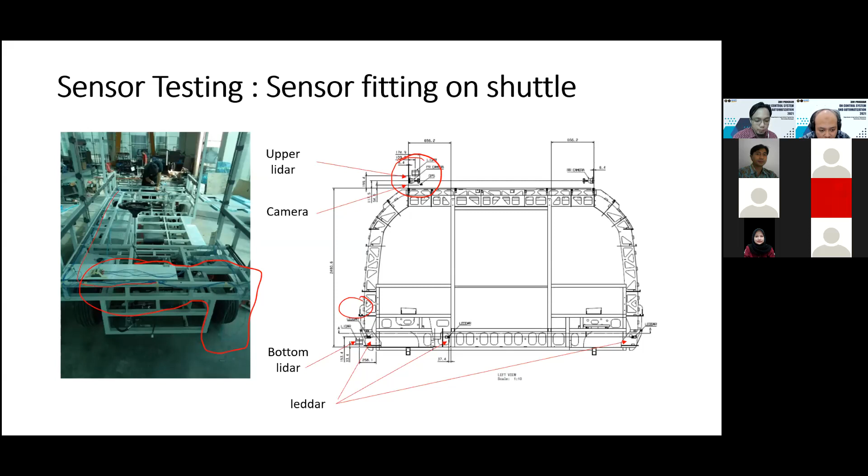So, some location placement of our sensor. When the shuttle is not yet finished, we try to do some wiring here, put some actual connections that we want, and drive this bus in a frame to see if there is any problem or not.

As engineers, we're not good at designing, so we pass it to another designer so that the concept looks futuristic. They give us the concept design and we fabricate it. For the engineers' part, we only did the mechanical design, electrical and software, but the design we left to another expert.

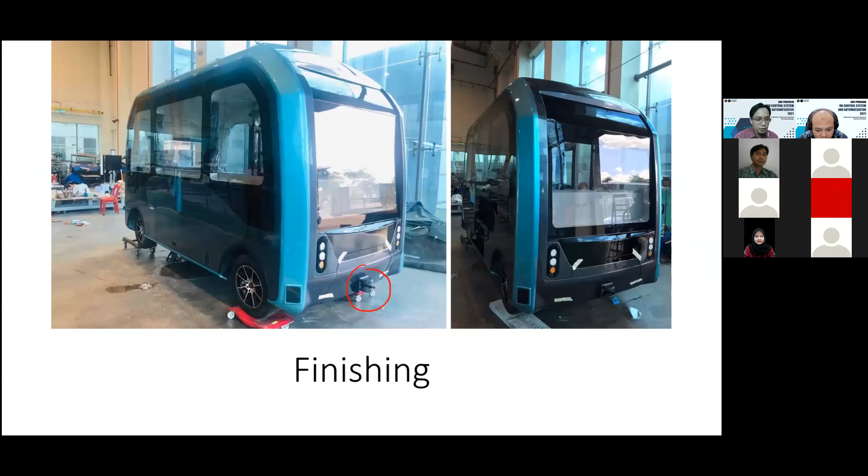So we can see here that we have a location for the sensor. We put it here and later we will install it with a sensor. This is the interior.

We tried to obtain a futuristic concept, like in the monorail, you can see there is a sliding door to get on and off the bus. We tried to put this in, and when we involve a lot of complex things, we forgot one single thing.

When we designed the sliding door, our experience was we forgot to put the emergency exit. So when the battery is running out and we are inside, we are trapped, because there is no mechanism to open the door. Because of that, we had to redo the mechanical design inside to put an emergency switch in case of power off.

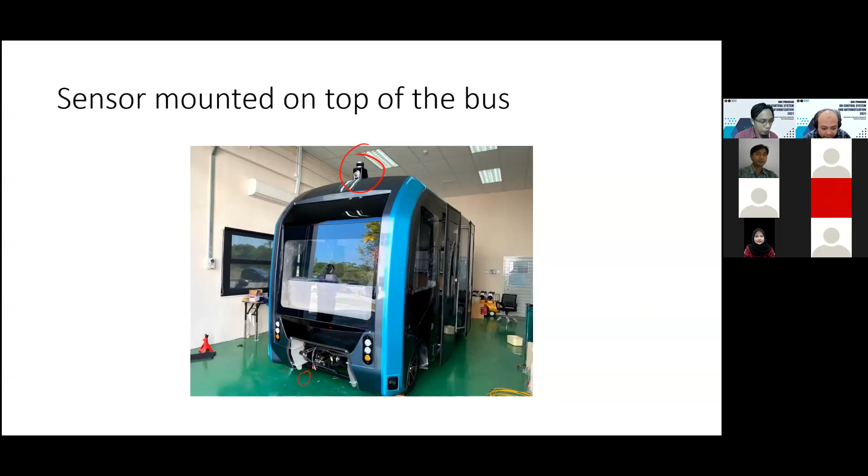We finished with installation of the sensor here, and a sensor at the back, but we don't put a case on it yet. And this is our first trial here.

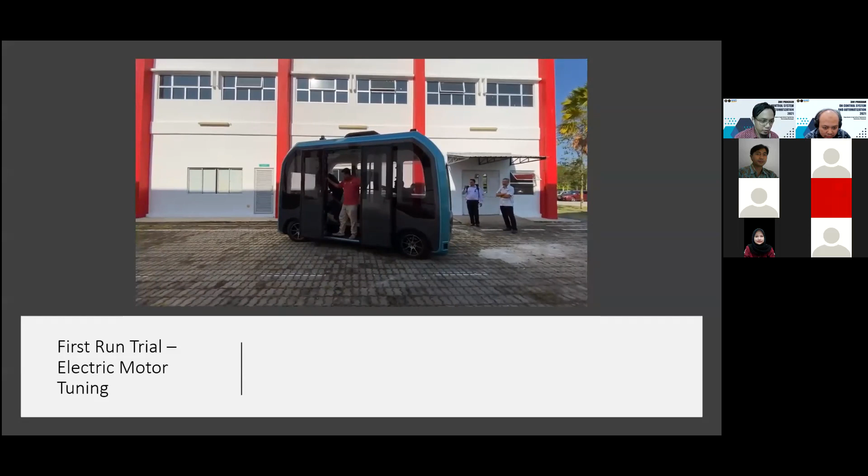From the slide, you can see from our first trial, when we move this bus, there is a jerking because the control system at the drive is not well optimized. We had a problem getting the right tuning value of the control system.

We tried to see what is inside during the prototype development. What is happening is we have one computer here to measure the current and to measure the jerking, if we have any problem during testing.

And of course, it happened many times that our bus broke because of current issues and mechanical issues that we had to repeat again. It's not like a sweet journey at all.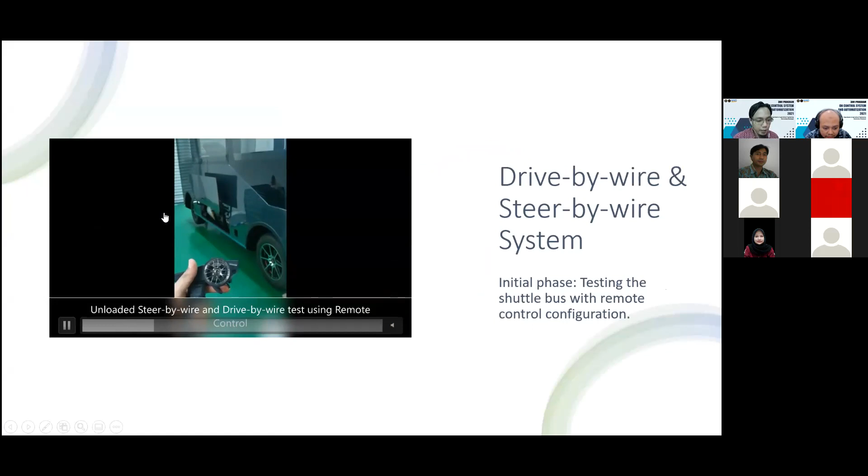After we finished developing the mechanical part, we tried to develop the drive-by-wire. You can see here that we try to control the speed at the back, and we can remote control the front steering here.

So this is how we control it, and after that we can give a command to our computer to control the steering motion, and we can integrate it with, for example, a gaming controller here. There is no mechanical linkage at all.

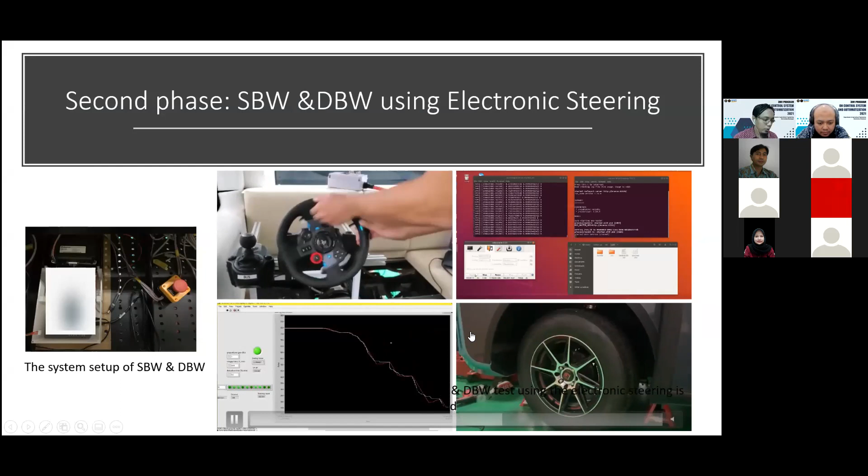From the gaming controller, we can create a control system to follow the instruction of the steering, so the tire can move to our desired direction.

And we did some verification through test case studies. We tried to control it. You can see this guy is controlling it through remote control. There is no steering here.

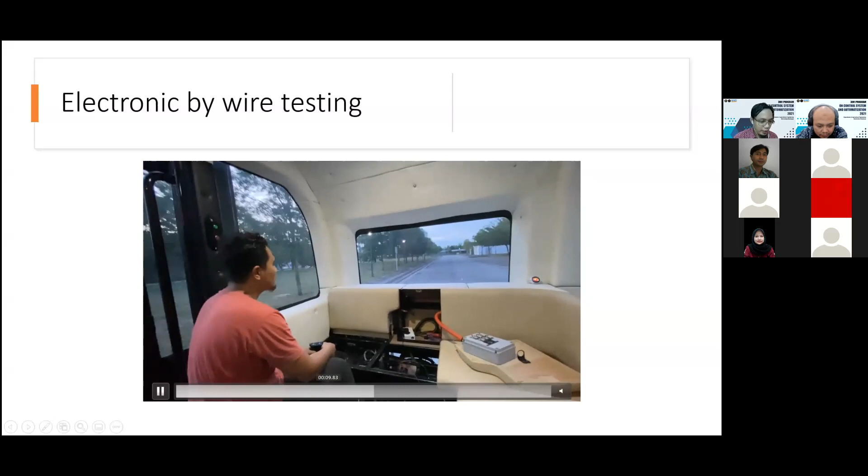We tried to move around the campus to see, and we tried to do parking. You see there is no side mirror here. So what we can do is go out and do the parking by using only a remote control.

After that, we did some mapping and localization using some mapping techniques. We installed some sensors and developed our own customized IMU. You can see the LiDAR connection here, and we did some calibration.

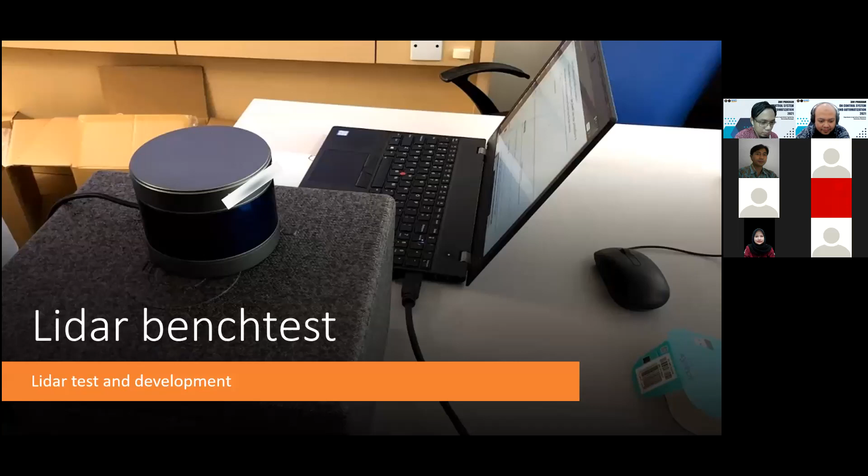The first test is inside this room. From the slide here, you can see there is a calibration of the LiDAR inside the room, and we test it in the car and in our simulation.

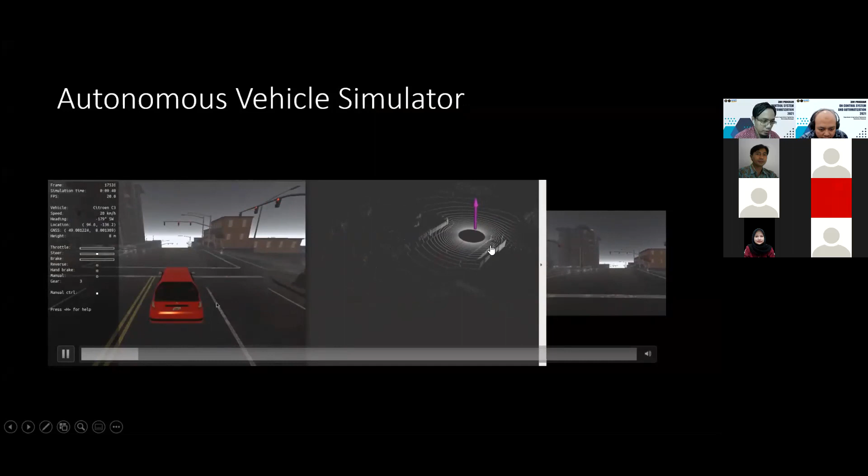In our simulator that we developed, we put some camera sensors. You can see some raining simulation here, and we have a LiDAR so that we can do some offline data mapping. We set up and try to create some map on our campus and faculty, trying to create a motion.

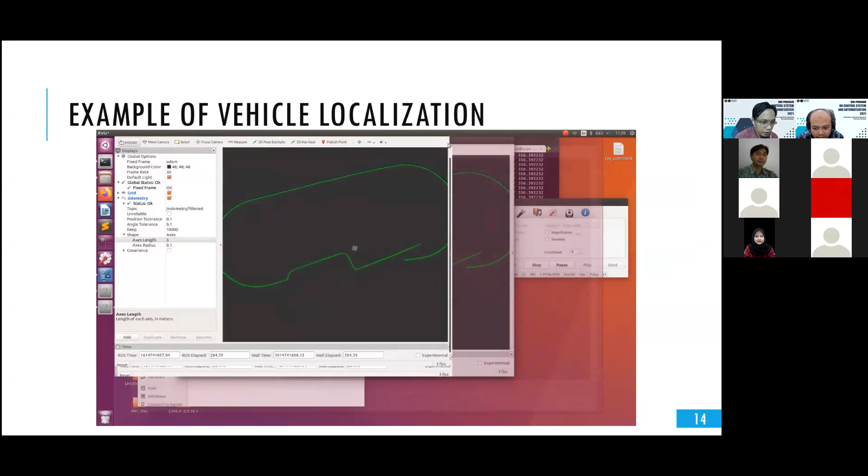This is the first example of sensor fusion. If you remember the previous topic, I talked about sensor fusion and showed a very small robot doing it. We did the same on the bus using the same concept, fusing between the odometer and inertial measurement unit to create motion of our vehicle.

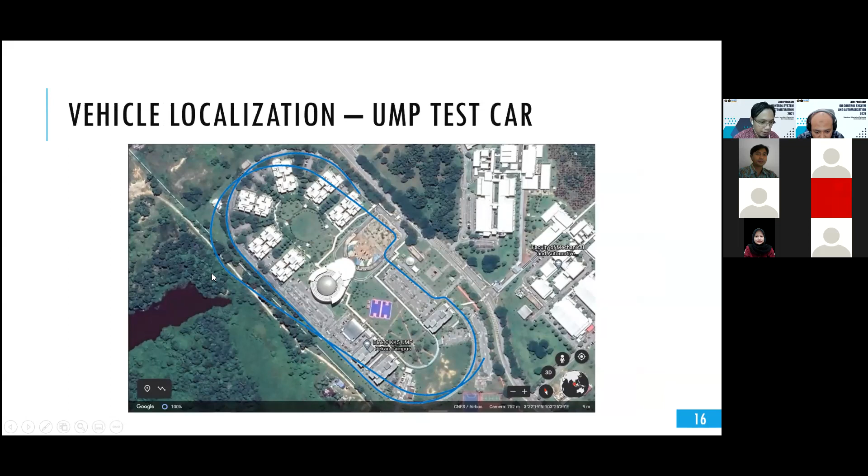You can see that there is a biasing. Actually we move here, but you can see there is an error when we put some map inside here. We did some error analysis inside the campus, fused with LiDAR, and did some compression.

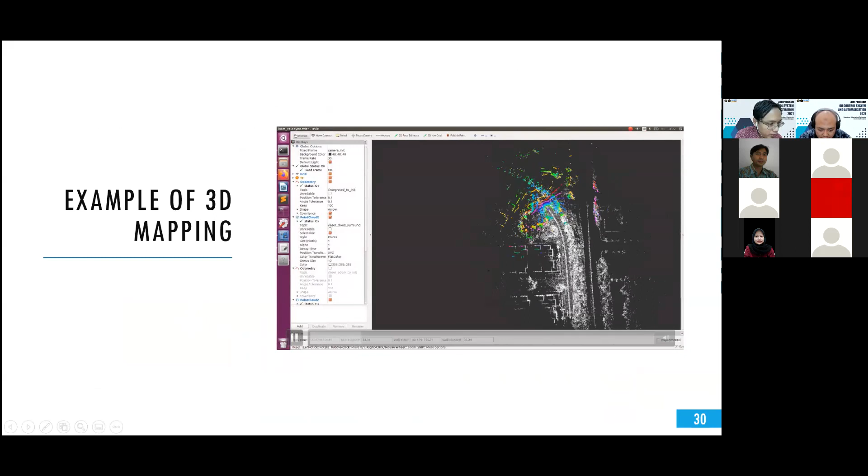This is an example of when we do 3D mapping. You can see how our bus sees in white color here. The white color is the mapping generated from the motion of our system. The colorful color here is the one being scanned by the sensor.

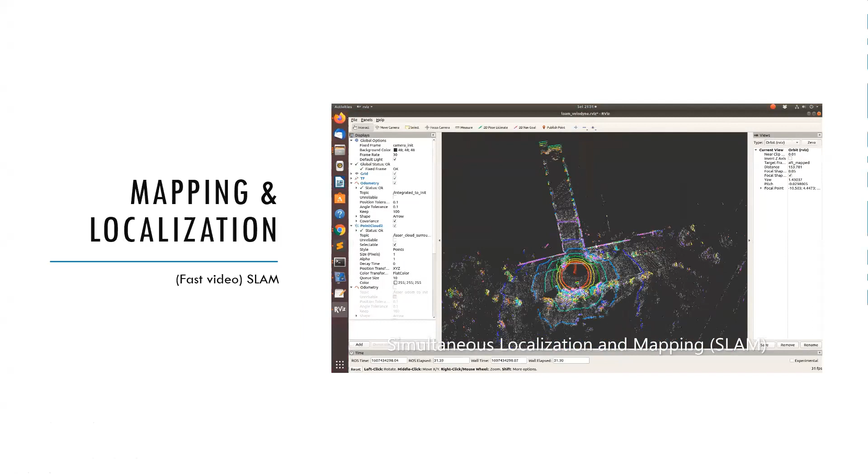The red color is the trajectory motion, same as in the simulation part. This is called SLAM, simultaneous localization and mapping. This is the fast video, you can see that we generate the trajectory in red color.

The scan is the color. Whenever you create motion in the colorful color, you can scan and generate a map inside your vehicle system. This is the map that you are going to generate, and eventually you can generate one complete map.

This map will go inside your vehicle so that when we want to generate the trajectory later on, we can define where the road is that our vehicle can go, and we can do a control system and planning.

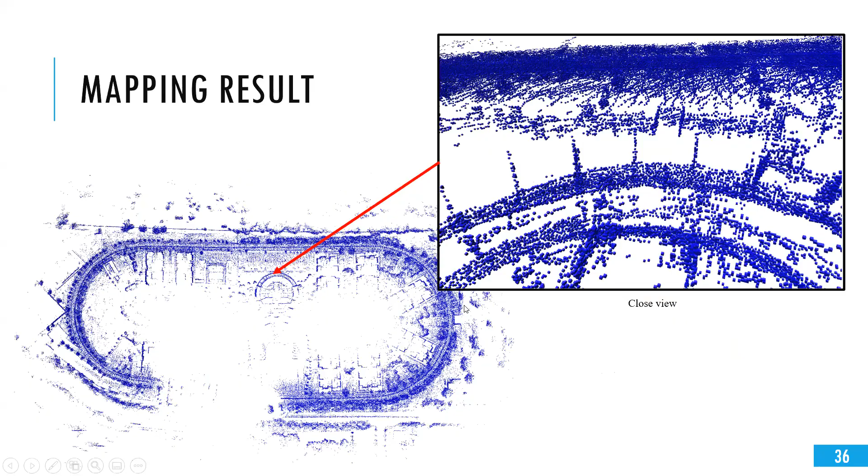This is some mapping result, and we convert this mapping into binary format to reduce some data. If you compare again with the map that we have, you can see it no longer has a biasing error. It's exactly overlaid with the actual map on our campus.

This is an example of the map being loaded when we move the vehicle. You can see that the map we developed can precisely show 3D elements like a tree, and there's a road over here. Let me fast forward a bit.

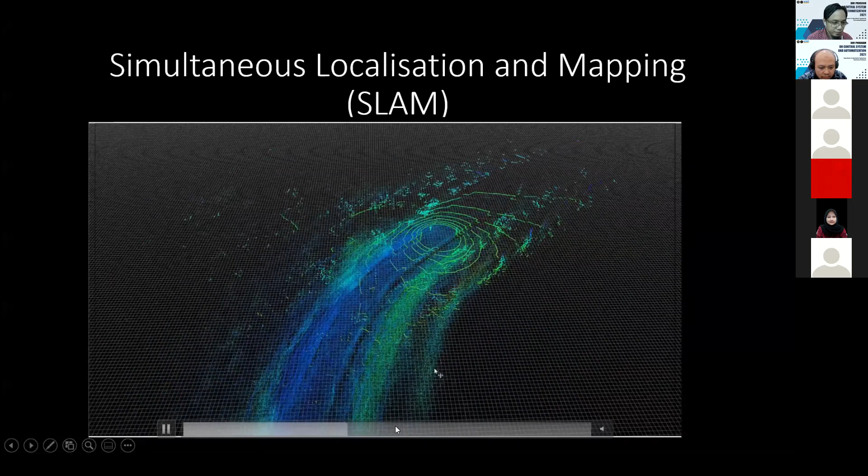There is a road over here that you can see the vehicle moving. This is the vehicle's current location as it moves. Whenever it moves, it tries to continue updating the map.

This is some example of how we do the testing, the navigation testing. After we did some mapping and everything was ready, we tried some sharp turning on our bus, and we tried some uphill tests to see whether our bus can take some bumping, because we have to ensure that it is robust.

This is the video showing, it's a very slow video, trying to take the uphill test to see whether it has any problem. We also try to verify the turning, whether it produces the yaw rate, or whether we can estimate the yaw rate of the turning based on the steering angle. So this is what we do, we do some turning test here.

We also do some random maneuvers to see, and we do the load testing. You can see many people inside the bus, and we try to see what is the maximum value. So that's all from here.

I think from sharing about the bus and some kinematics, you see that when we want to develop an autonomous robot, there are a lot of things, especially for a complex system, that we have to consider. Each system is dependent on each other. So if we focus more on software but neglect the mechanical parts, you can see that if there's a failure on the mechanical part, we cannot proceed with the software, although we have very good software.

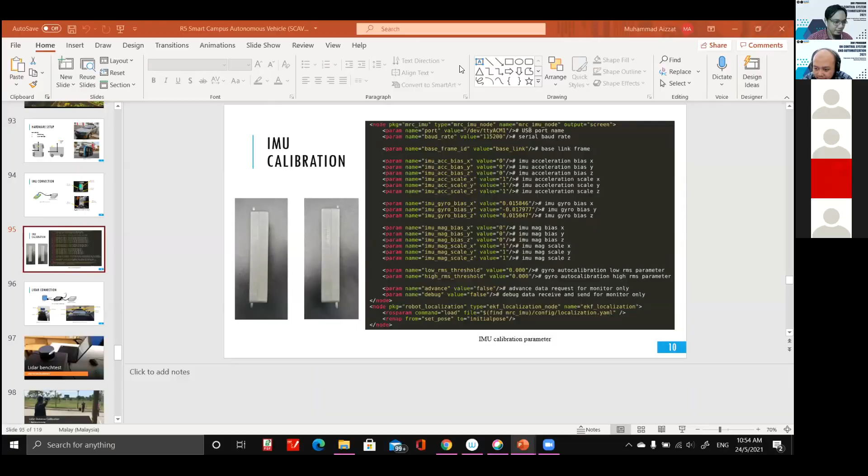Okay, thank you very much, Dr. Aizzat. Really, there are no other questions? No question?

Very shy. Before the midterm, they learned about Laplace transform and also mathematical modeling, but maybe it should be your part to show how to apply the application. So this is the application. Maybe you share the concept, so it's good if they can relate this thing.

Okay, if there are no questions, then I would like to thank you very much Dr. Aizzat for these 3 lectures. I think the control system and automatization courses this semester is very special, since we get a lot of new knowledge and insight from industrial speakers and also overseas speakers like Dr. Aizzat. We will use what we have got this semester to update our syllabus and curriculum, and also we will start the project, and I hope that some students also will join us.